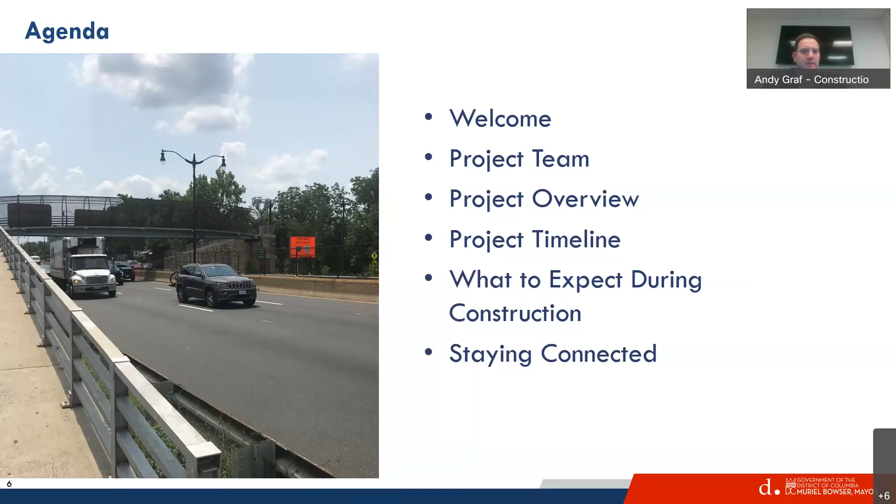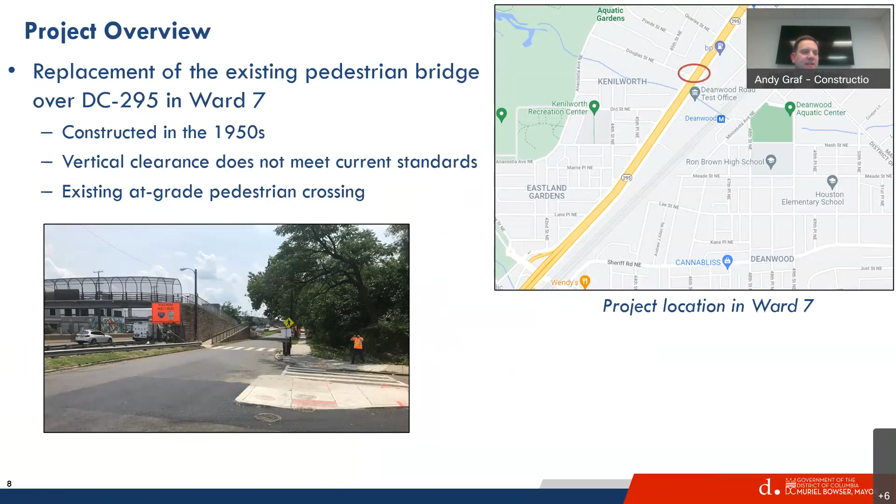So the purpose of this project is to replace the existing pedestrian bridge over DC 295 and Kenilworth Avenue, highlighted in red here on the map. This is one of just a few pedestrian bridges that provides access across the DC 295 corridor. The existing bridge was constructed in the 1950s and has a vertical clearance over the roadway that does not meet current standards. Additionally, accessing the bridge requires pedestrians to cross the Kenilworth Avenue service roads, creating an additional interaction between pedestrians and vehicles.

So the objectives of this project include increasing the vertical clearance over the roadway to meet current standards, providing ADA compliant access across Kenilworth Avenue and DC 295 via new access ramps on both sides of the bridge. And finally, since this is a complete replacement of the existing bridge, we're improving the structural integrity of this important pedestrian crossing that was initially constructed decades ago.

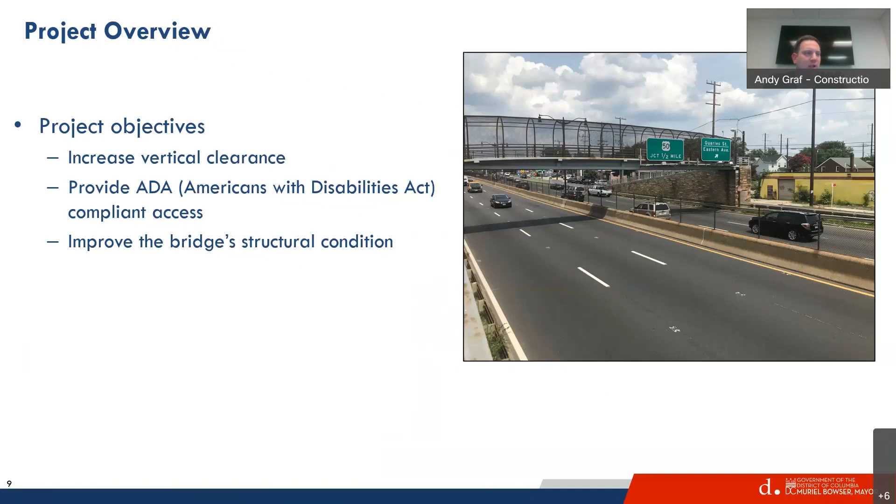So I just want to take a further look at a few more elements, starting with the bridge itself. The new bridge will be a prefabricated steel truss, meaning it will be manufactured off-site and not delivered to the project until it's time for installation. The bridge and access ramps are comprised of 8 spans supported by 7 concrete piers. The new bridge will have a vertical clearance of 17 feet 6 inches minimum over the roadway, now meeting current federal and DDOT requirements.

The width of the new pedestrian walkway will be increased to 12 feet and contain a welded wire safety mesh for the safety of pedestrians as well as vehicles below the bridge. One of the key improvements of the project is that the bridge will span not only the DC 295 portion, but also the Kenilworth Avenue service roads. Again, this is important because we're eliminating that at-grade pedestrian crossing with the service roads.

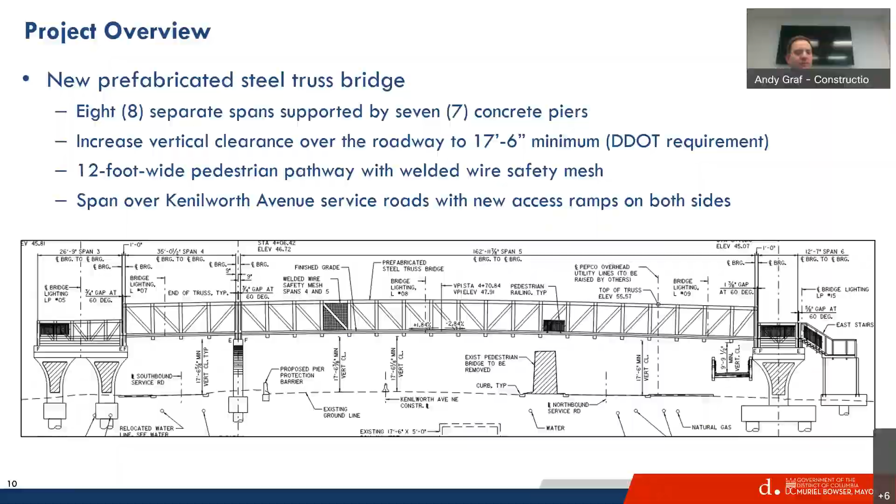Now I just wanted to speak a bit more to the bridge access in more detail. I think this is really one of the key features, and it's going to be very noticeable once these new access ramps are under construction. The new access ramps will be constructed similarly to the bridge, using the structural steel truss and concrete piers. These new ramps will provide ADA compliant access, again, without the need for pedestrians to cross at grade along the service roads.

Additionally, the project is also going to construct concrete staircases adjacent to the access ramps for an alternative access to the bridge.

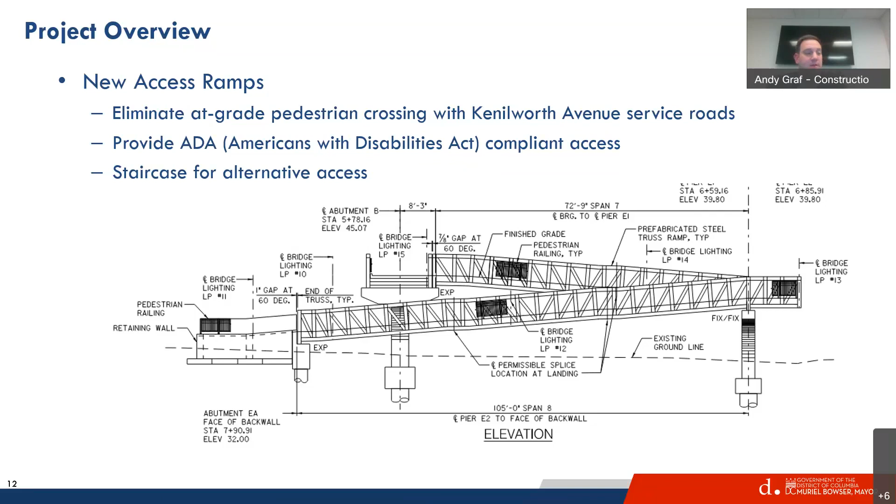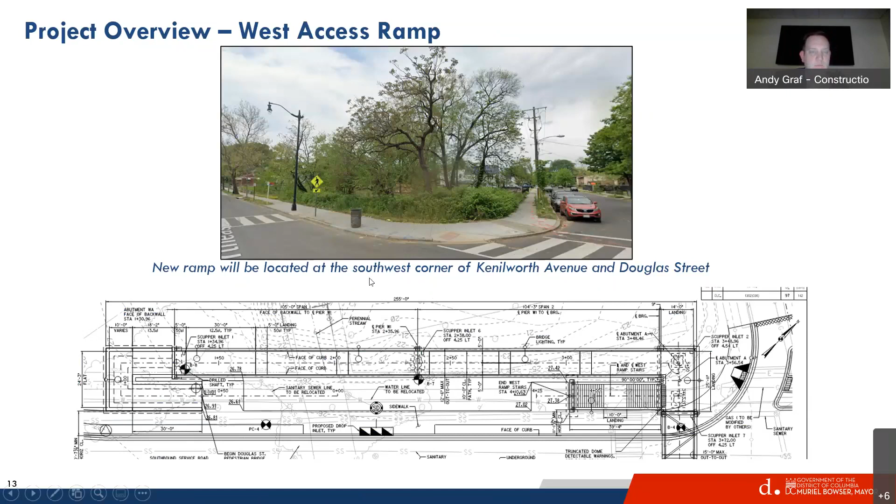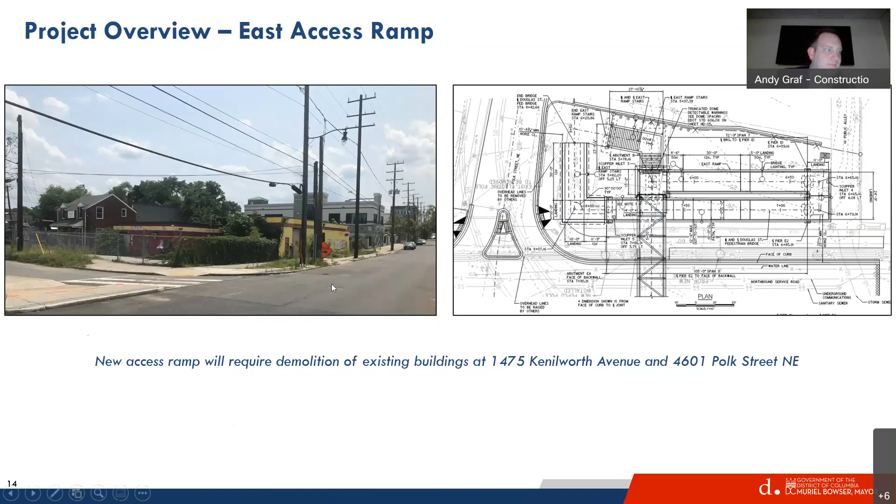Finally, for a general overview of the project and the scope of work, I want to highlight some of the safety improvements we're undertaking. We are going to install new high visibility signage and pavement markings, including at the crosswalks of both Douglas Street and Polk Street, on both sides of the bridge. The new bridge, as well as the access ramps, will be ADA compliant, and both the ramps and bridge will have new LED lighting for pedestrian visibility during nighttime.

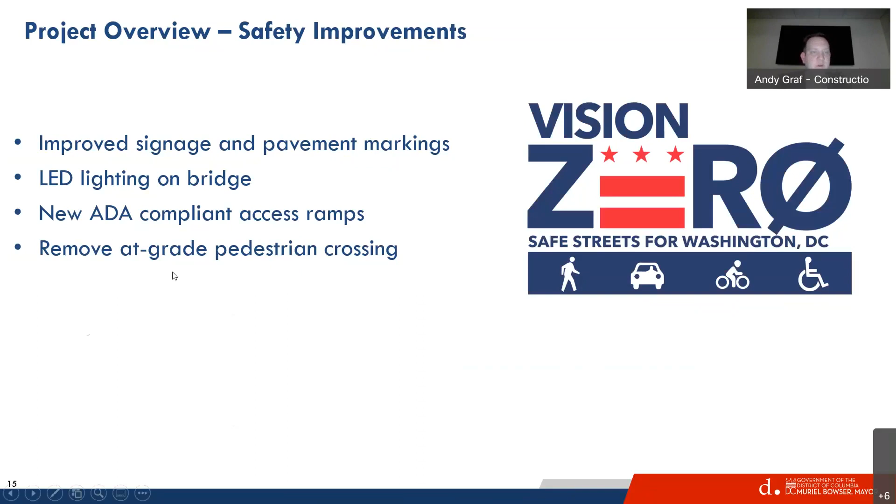Again, I've hit on it a few times—probably the most key safety feature of the project is that it's going to span over Kenilworth Avenue service roads as well as DC 295, removing that at-grade pedestrian crossing along the service roads. So that's a general overview of what the project's going to accomplish. I'm going to pass it over to Chris Vovak, resident engineer, to talk about the project schedule.

Thanks, Andy. So let's get into the construction timeline. The Douglas Street pedestrian bridge has an expedited construction schedule of 12 months. The work is broken down into different phases. Currently we are in the pre-phase work and soon to get into the 3 construction phases. Let's break all these phases down in more detail.

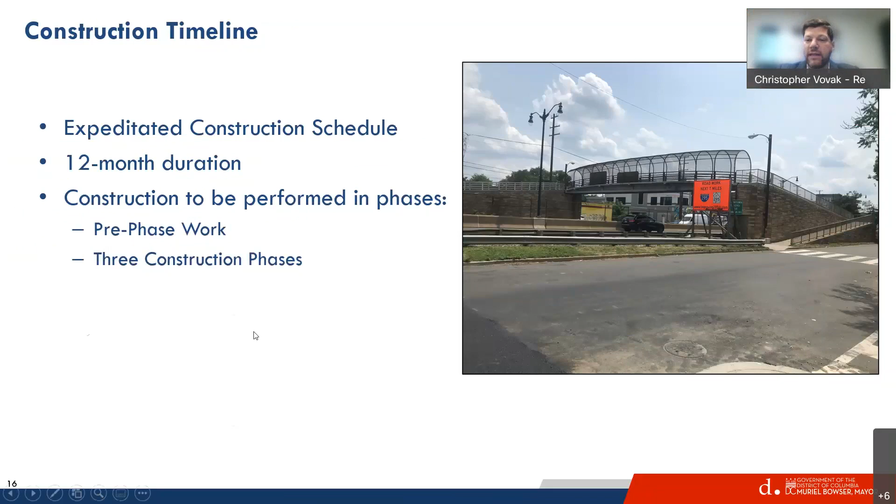Now we're going to talk about what exactly is going on in the phases and how it will impact the public. We are currently in pre-phase work for the project, continuing until early spring. This consists of upgrading water main and sanitary sewer work. A large part of this pre-work phase is construction of the West Bridge Pier, including bringing in a large caisson machine to drill for the below-grade foundations, lots of rebar placement with formwork, and lots of concrete trucks for pouring in-place concrete structures.

Lastly, there will be improvements for the sidewalks and crosswalks along the service road. How does this affect the public? Currently we have already relocated the Metro bus stops on the southbound service road and detoured vehicular traffic on the southbound service road at Quarles Street. There will also be a few restricted parking spots, mostly to allow Metro buses the space they need to turn on Quarles Street without damaging any vehicles. These are typically reopened at the end of each workday and for the weekends.

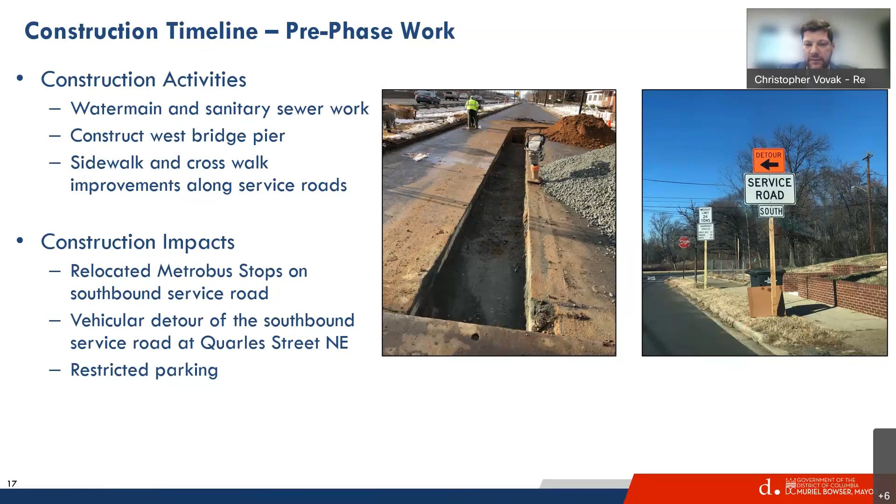Now let's get into the 3 construction phases. Phase 1: as previously stated, we will be demoing the 2 existing buildings on the east side, allowing space to construct the ADA compliant east ramp and abutment. In conjunction, we'll be working on the west access ramp and abutment structures, and improving the sidewalks and crosswalks along the service road. Both these ramps have drilled caissons, rebar placement with formwork, some retaining wall work, and a lot of concrete. So how does this affect the public?

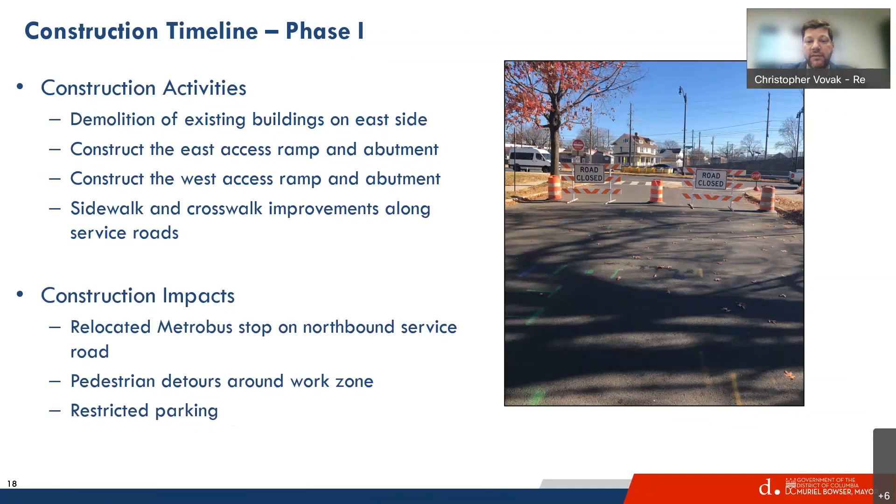We will be relocating the northbound Metro bus stop on the service road and have a pedestrian detour that will move pedestrians off the sidewalk and onto the street, but with safety barriers according to the plans. Lastly, there will be some restricted parking in this phase as well.

Now let's get into the most critical part of the project, the part that will impact the public the most: phase 2. Phase 2 is where the existing bridge over 295 will be demolished and the new bridge will be installed. Let's get into how this impacts the public.

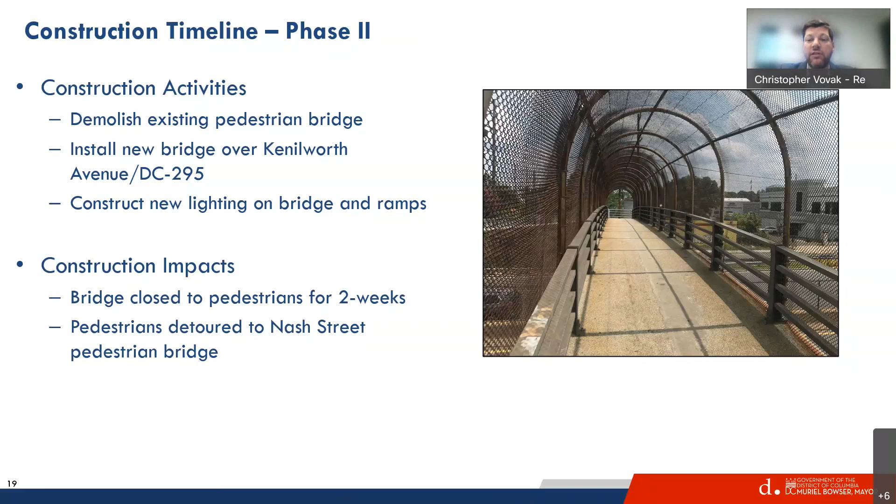The pedestrian bridge closure for the public will only last for 2 weeks. The pedestrian detour for this time will be moved to the Nash Street pedestrian bridge. Prior to this occurring, there will be extensive public outreach to keep the public notified of the dates.

Moving on to phase 3. Phase 3 is to install the final improvements for the project, including restoration of the asphalt within the project corridor. Additionally, the pavement markings and signage will be updated. Lastly, there will be landscaping and some bioretention areas placed on the project.

So how does phase 3 impact the public? The impact will be much smaller, with only daytime lane closures and some pedestrian detours around the active work zones.

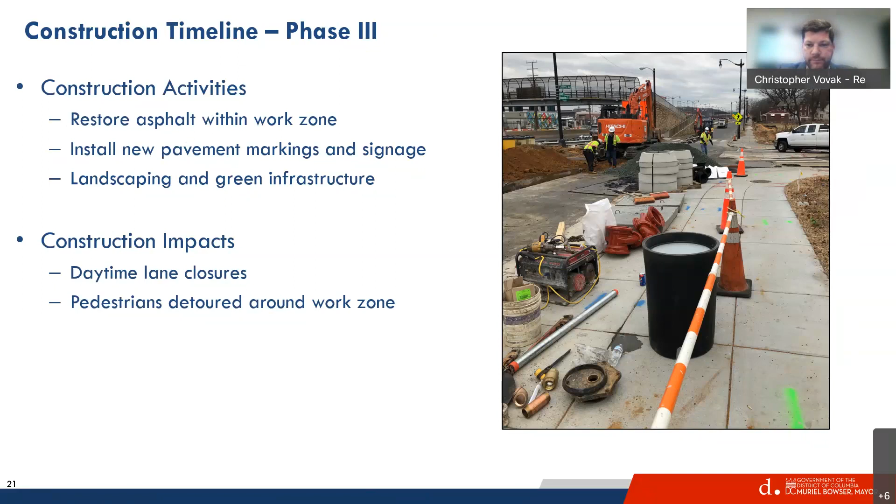That is a summary of each phase. Let's talk about the timeline for completing each phase. Construction started at the end of 2021, and we are currently in the pre-phase work, with the 3 construction phases starting soon. I'd like to highlight that with our current schedule, the project looks to open the new pedestrian bridge at the end of summer this year.

Once the 3 construction phases are complete, punch lists and closeout efforts will be completed and wrapped up by the end of the year.

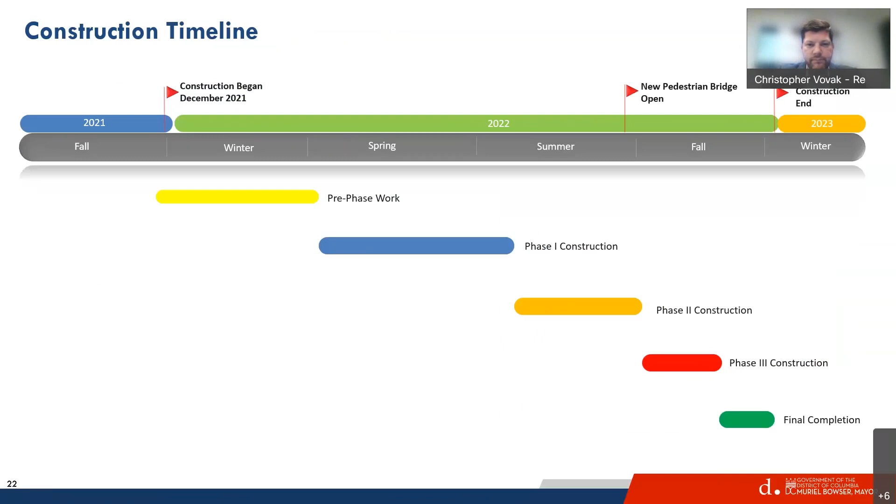Some other things to expect during construction: construction hours are typically between 7 a.m. to 5 p.m., Monday through Friday. Saturdays and Sundays aren't anticipated at this time but may be necessary due to weather or other events. Events such as the demolition and installation of the bridge itself will occur during night hours and will even close 295 for periods of up to 20 minutes at a time.

Again, prior to these events there will be extensive public outreach. In order to complete the construction, the project will execute lane closures and detours for vehicles and pedestrians. We will be using high visibility devices to help assist the public around the work zone. All detours will be properly signed. We do ask that you please respect the work zones so that we can complete this project as quickly as possible and turn it over to the public.

I will now turn this over to Shayna to talk to you about staying in contact with the project.

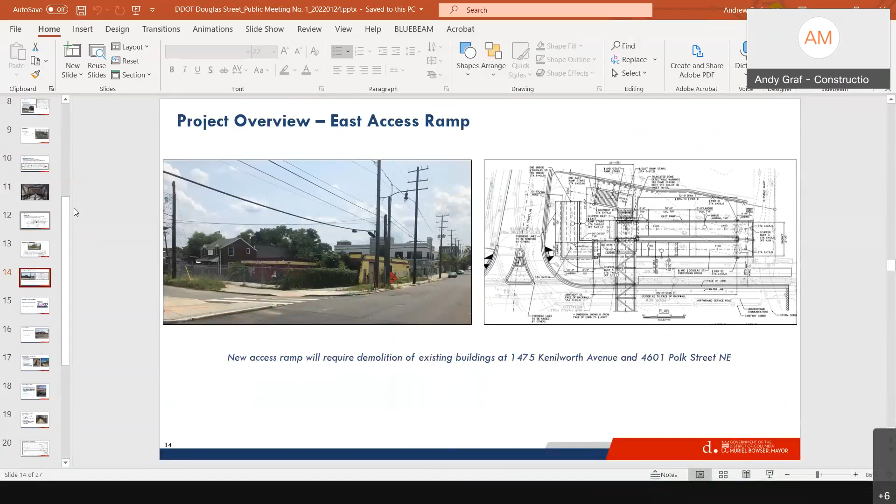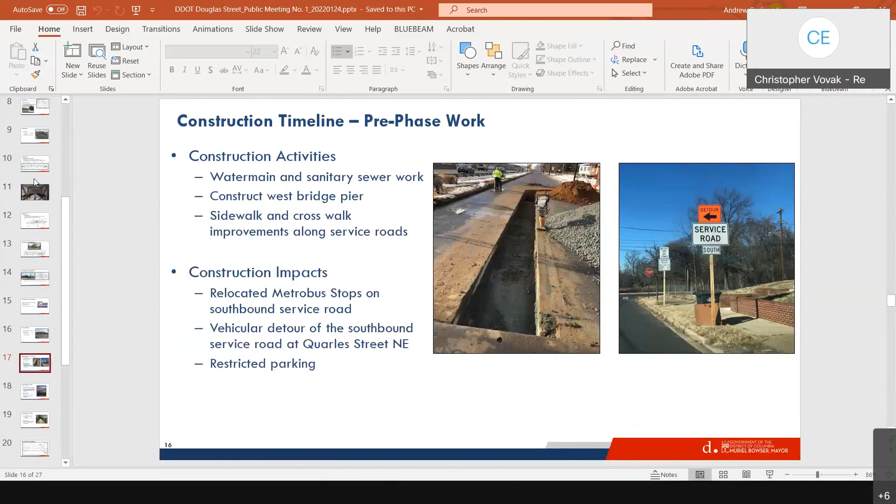Yeah, Chris, I'll pull up the slide here. We just want to talk to that—to be clear, it's a pedestrian detour, not vehicular traffic. So he's bringing up the slide now. Give him a second... keep going... right there, yeah, this is the slide.